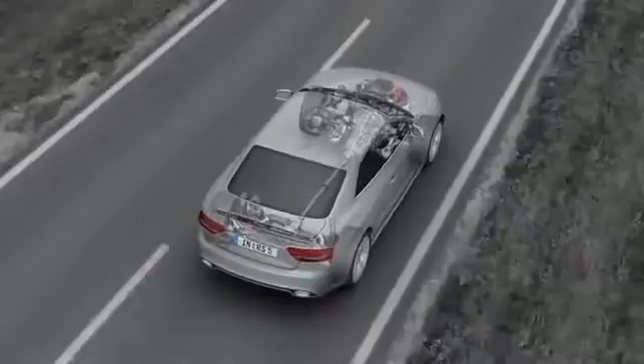Its permanent safety advantage makes it far and away superior to other all-wheel drive systems that have to be activated. The principle is simple. Just as four brakes provide for better deceleration, four driven wheels provide for better acceleration and greater lateral stability.

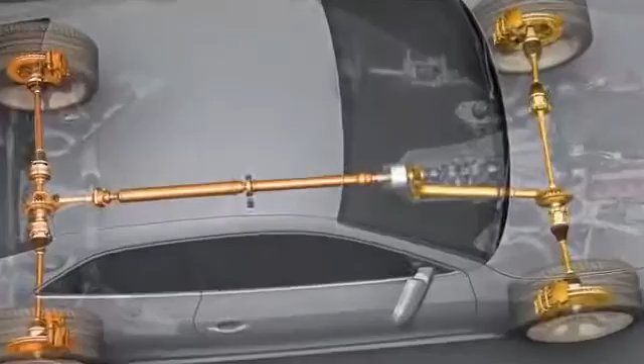The new Audi RS5 sees the introduction of the latest generation of Quattro with crown gear center differential and torque vectoring. The task of the center differential is to distribute the drive force of the engine to the front and rear axles.

If, for example, one of the wheels on the front axle starts to spin, the crown gear center differential will immediately spring into action. Up to 85% of the drive force will promptly be fed to the rear axle. This can be seen here with the turning differential gears.

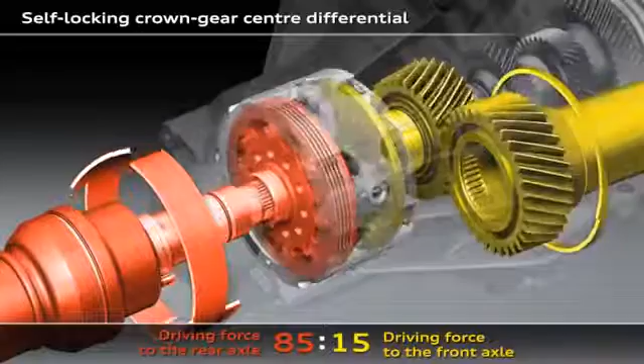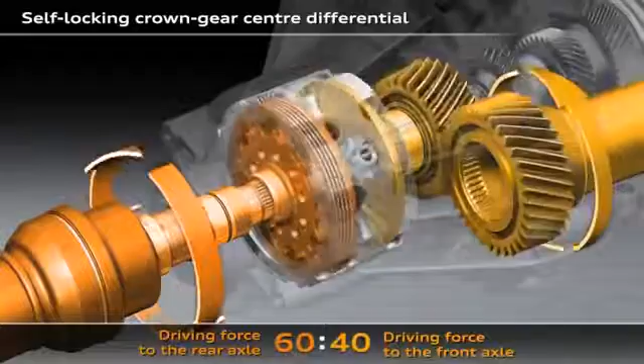If the wheels on the rear axle start to spin, the crown gear center differential will immediately feed up to 70% of the drive force to the front axle. In its basic configuration, 60% of the drive torque is fed to the rear axle and 40% to the front axle. Here you can see the structure of the crown gear center differential, the heart of the Quattro drivetrain.

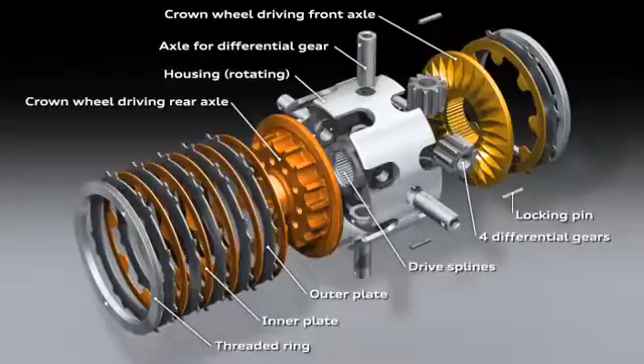The drive force is introduced via the components illustrated in grey. The gold-coloured parts drive the front axles and the bronze-coloured parts drive the rear axle. If there is a difference in speed between the front and rear axles, the center differential will spring into action and generate a locking torque with the plate packs. That means that the drive force will be distributed to the two axles according to actual requirements, allowing more power to be transferred to the wheels.

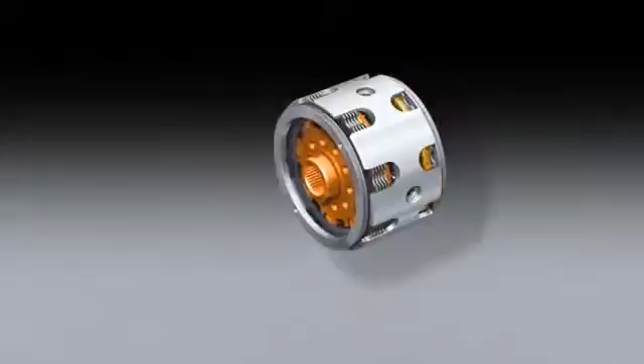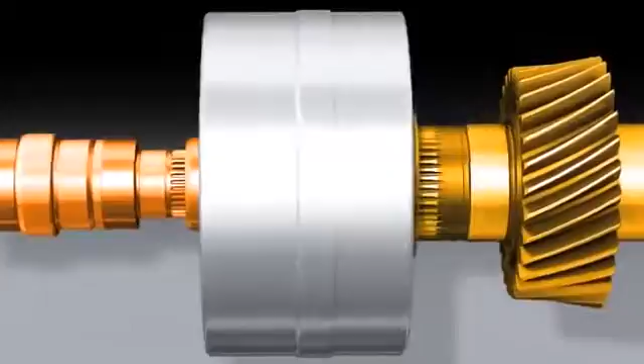The new crown gear employs a metal cap to keep flow losses to a minimum. The basic distribution is generated by gears with different diameters meshing with the two crown gears. The arrows symbolize the flow of torque or force.

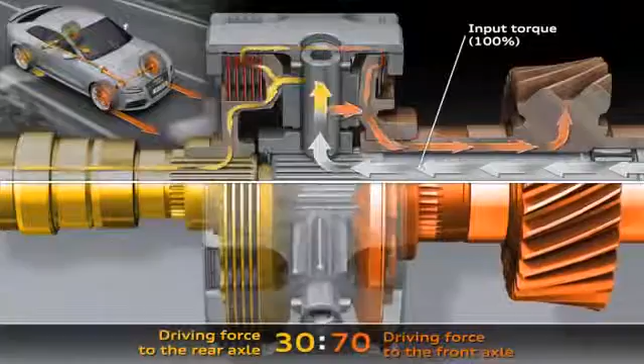For example, if the wheels on one of the drive axles are unable to transmit the full force, the center differential and its differential gears will spring into action. The force will immediately be fed to the axle with the better traction, with zero time lag. Without ESP intervention, this happens with up to 85% to the rear axle and up to 70% to the front axle. With an electronic control system, up to 100% can be fed to a single axle.

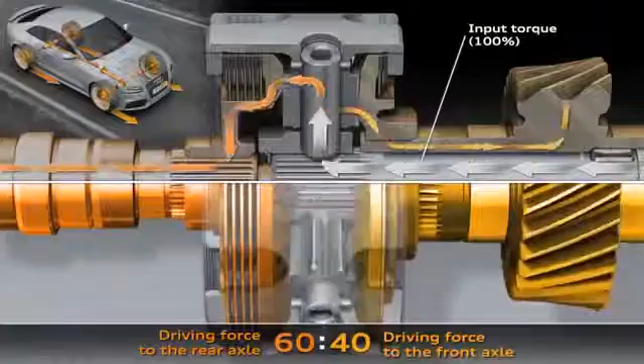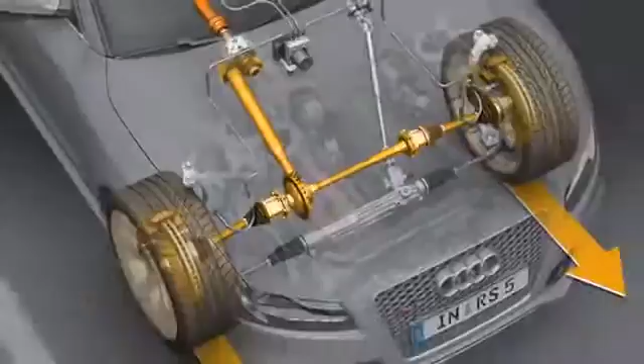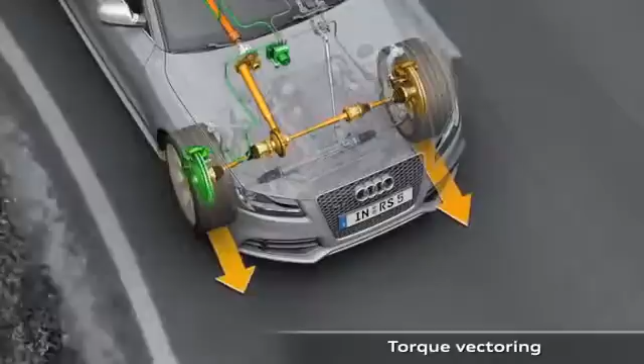The good dynamic performance characteristics of the Audi RS5 with crown gear center differential are noticeably extended in conjunction with torque vectoring. An additional steering torque is generated according to the situation and the driver's needs. Finely metered braking torque is applied to the two wheels on the inside of the curve. This creates a difference in drive force on the left and right-hand sides.

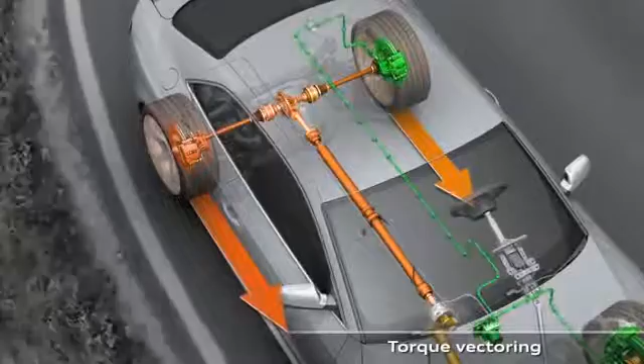At the same time, the longitudinal drive force distribution is optimized according to the driving situation by the ratio of the brake force application on the front and rear axles. When pulling away and when accelerating rapidly, more drive force is fed to the rear axle.

The combination of crown gear center differential and torque vectoring on the Audi RS5 provides for precise handling even when cornering. This happens with zero time lag, in accordance with the driver's steering and acceleration commands. The dynamic drive force distribution allows excellent exploitation of the traction potential, good track stability, and outstanding agility.

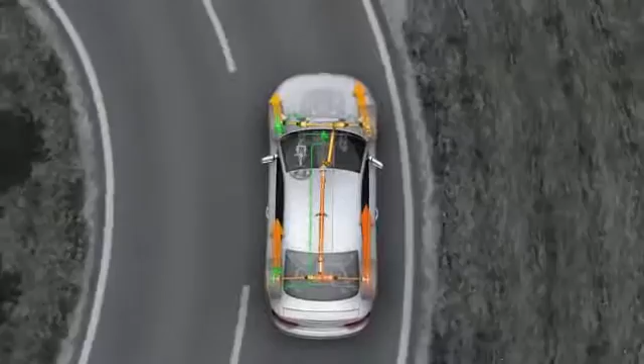The torque vectoring system was developed by Audi to act before the wheels start to spin, reducing undesirable effects. The combination of Quattro drive system with crown gear differential and torque vectoring gives the Audi RS5 outstandingly precise control right up to the car's handling limits.